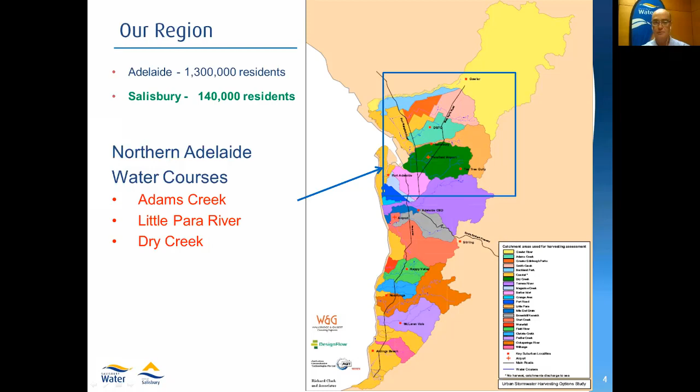So just zooming in a little bit on where we are, this is Adelaide, and the City of Salisbury is out in the northern suburbs of Adelaide. So effectively about 10% of the total population of Adelaide reside in the Salisbury area, and so we're talking about this green area on your map. And we have 3 natural watercourses that traverse Salisbury: Adams Creek, Little Para River, and Dry Creek.

Just looking a little bit of detail there, the watercourses find their way down to the marine environment and the Barker Inlet. For Adelaide people and South Australians in general, the Barker Inlet is a very precious marine environment. You can see the inlet, the mangroves. It's a very important breeding area for many of our aquatic species, but in particular the King George whiting, which is one of our tastier fish. If you're ever down in Adelaide, it's certainly well worth trying. But it's a very sensitive marine environment, and our urban stormwater all discharges into that environment.

So some 40 odd years ago, or in fact maybe closer to 50, as John Radcliffe has outlined in his excellent article on us, '50 Years of Water Sensitive Urban Design in Salisbury' - well worth a read if you get a chance. What we've effectively been able to do over the last 50 years is build a network of wetlands that intercept every bit of urban runoff before it actually reaches that Barker Inlet. We've got schemes built all the way down each of those watercourses, and what we try to do is intercept as much of that rainfall or stormwater as possible, treating it up in the wetlands. They are all constructed wetlands, not natural wetlands - they've all been built for the specific purpose of cleansing the water before it hits the Barker Inlet.

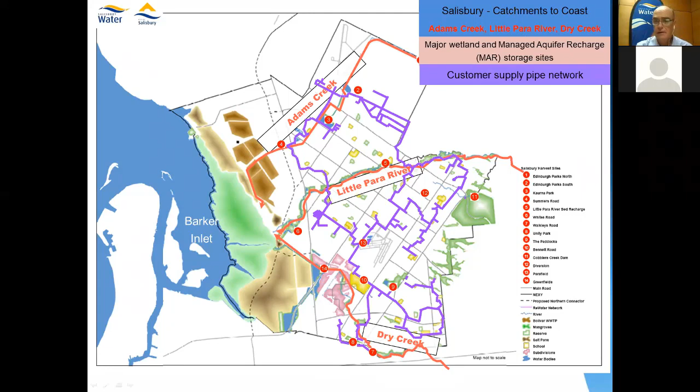Okay, so just a quick recap. Salisbury Water, our small water utility, specialises in harvesting the stormwater runoff from the urban catchment. We clean it up in constructed wetlands and biofilters. We have a number of reasonably large biofilters that treat the stormwater to meet the strict EPA quality criteria before we can inject it into our aquifers.

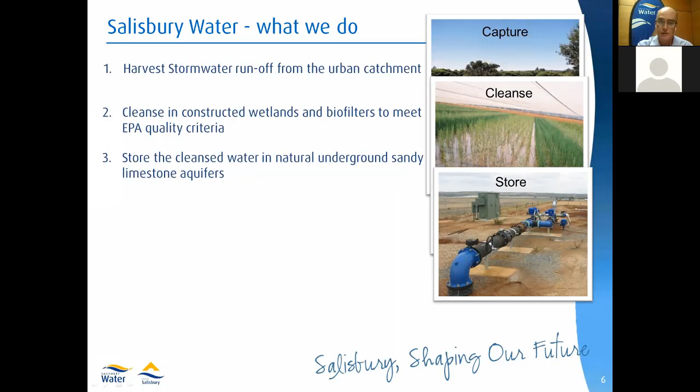We're very fortunate to have good confined aquifers, and that does give us a big advantage, which enables us to store a very large volume. We typically store 4 to 5 gigalitres, or 4 to 5,000 million litres of water per year, and then we can pull it out in the long dry summers. For Adelaide, that can sometimes be 12 to 14 weeks through summer where we don't get a single drop of rainfall, so that storage is critically important for us.

We're also starting to get right into wastewater, a little bit of a circular economy. We've already started with one customer where the water we supply to him, we take his wastewater back again, clean it up and sell it on to the next customer. We're about to take another big step, where one of our biggest industrial customers, who we supply over 1 million litres of water per day to, we will be taking their wastewater back, with the aim to put it into an energy recovery plant, an anaerobic digestion plant, to recover energy. We'll then take the digestate from that AD plant, blend it with more of our stormwater, and provide it to farmers in the area. So it's a really good example of a circular economy.

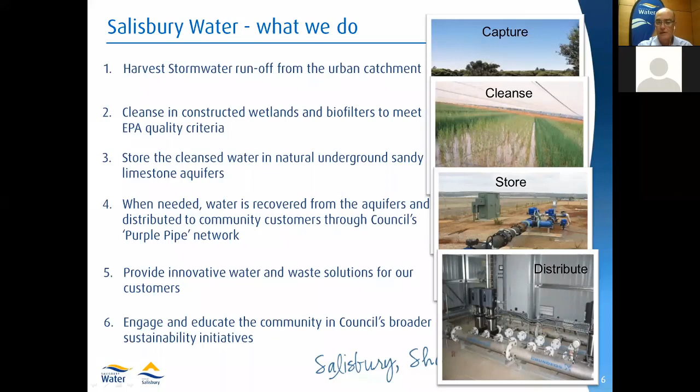The other thing we do is provide tours for the public. Quite a number of school groups and members of the general public like to come to our wetlands, and we have several thousand visitors per year that we take on guided tours through the wetlands to educate them on what our sustainability initiatives are all about.

However, most of our urban water, those 70 wetlands I mentioned earlier, we're intercepting in basins, and the first stage of our wetlands is always a sedimentation basin, then we get into the open water bodies. It's that treatment train, and typically can take 10 to 15 days to get the water quality to meet EPA standards. Once we've got to that standard, we're injecting into the natural sandy limestone aquifers. So that's a very simplified description of what we do.

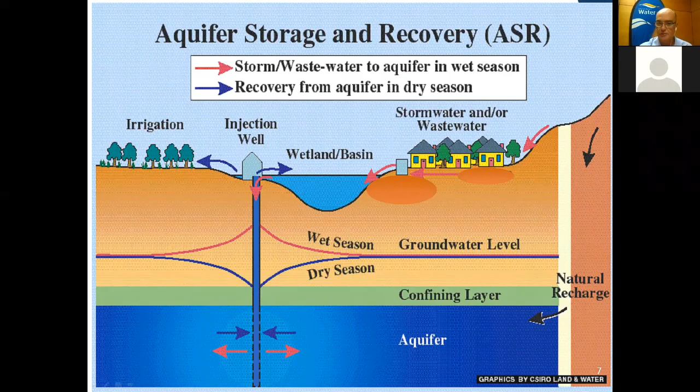So the current state, we're operating 63 wells now, and it's not just stormwater recharge. Only 31 of our wells are actually dedicated to the technique of aquifer storage and recovery. ASR is what we refer to as the system where we put the water into the same well that we extract from, so it goes in and out of the same well.

We were practicing ASTR, aquifer storage, transfer and recovery, where we would inject in a set of wells and allow the water to percolate through the aquifer and extract. We also operate simple extraction wells where we trade the credit, the actual license credit we get for injecting. And the resource manager here in South Australia, the Department of Environment, Water and Natural Resources, encourages us to inject in areas where the aquifer is stressed.

So where, say, market gardeners or industry have over-extracted, we will inject to bring those native groundwater levels back up to the natural level. In return, we get 80% of that injection credit that we can transfer to our own community extraction wells. That saves a small fortune on having purple pipe crisscrossing the city. We can actually put our well right next to a school or next to a sporting field and provide the irrigation water.

We have, however, built over the last 10 years a network of 150 kilometres of purple pipe, and 90% of that has been laid by directional drilling techniques, so horizontal directional boring. Typically our pipe sizes don't get into really large diameters, but most of our network is 280 millimetres, slightly smaller than a 12-inch diameter. That's because up to that size, it's still quite cost effective to do the directional drilling technique. Once we get beyond that size, it actually gets quite expensive, and open trenching techniques are more affordable.

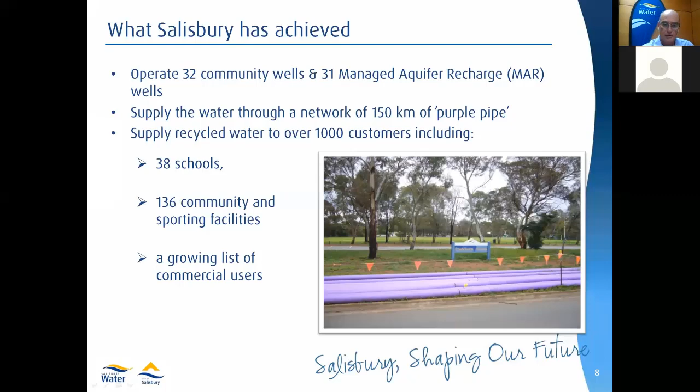And first and foremost is flood protection. We must address flood protection for all of our residents, and that's enshrined in legislation, so that is our key priority. We believe that every time you do a flood mitigation project, you can create habitat, you can create biodiversity, whether it's a corridor or within our wetland reserves, then we can create that as part of a holistic approach.

Pollution prevention is absolutely crucial to us in terms of protecting that receiving environment, because that's what people value. People in Adelaide love that marine environment - they're down in the sea every weekend, fishing, surfing. That's a very high priority for Adelaide's residents, so pollution prevention is a very key task for us.

From an economic point of view, reducing dependence on imported water is key. SA Water, our state utility, does an excellent job bringing in high quality drinking water and wastewater services, but it comes at a cost. The simple question is, can we continue to use that high quality, expensive drinking water to keep our suburbs green? That's what has driven a lot of what we've done out here - getting cheaper water so we can keep suburbs green and have playing fields the kids can play on.

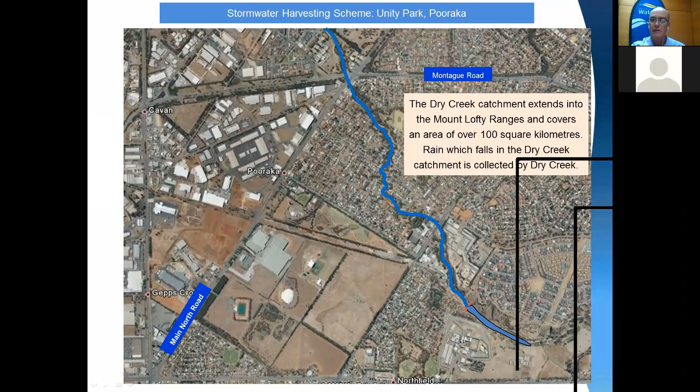So our Unity Park project at Pooraka was set out to do that, where we actually harvest from a considerable distance away from where we do the storage and distribution. It's basically trying to grab whatever free land we could and put different elements in. Our harvest site is in the suburban area on Dry Creek.

We transfer it in two ways: from a weir on Dry Creek and from a pump station down in the suburbs to our sedimentation basin. The sedimentation basin is located in a very nice little park that has a skate park, a playground, a dog park, and all sorts of great community facilities. We've been able to help landscape that and keep it green for the young people.

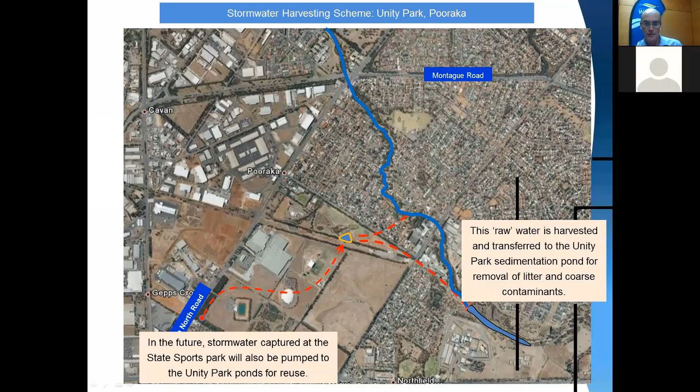From that sedimentation basin, we've already set up a node for future use from State Sports Park, which I believe has just been announced will become the new headquarters for soccer in South Australia. But from that sedimentation pond, we distribute to a set of biocells and also to twin wetlands.

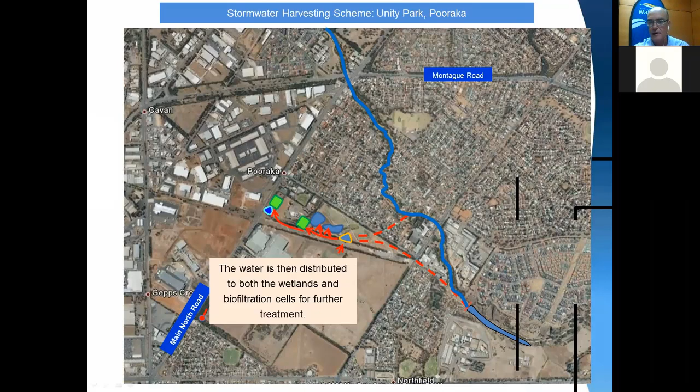When I talk about biofiltration cells, they're typically the size of a swimming pool. We've got about 11 of those, about the size of an Olympic swimming pool, and they're a much more efficient use of space. If you're really tight for space, typically the footprint of a biofilter is about a third of what you'd need for a constructed wetland to get the same water quality.

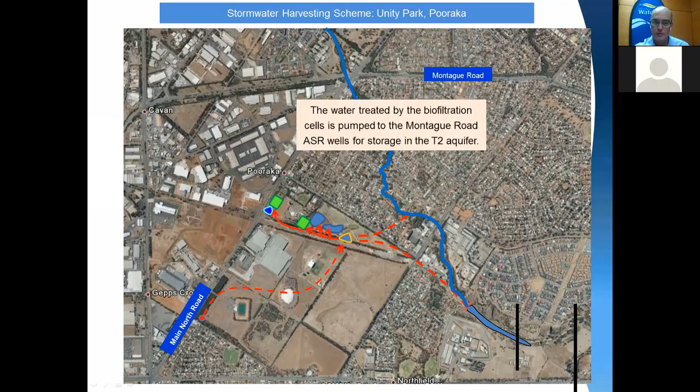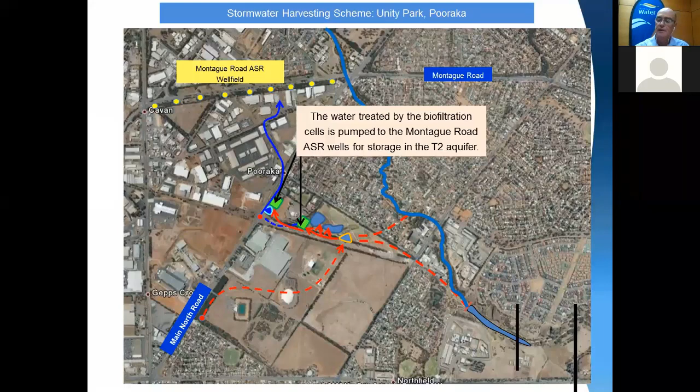Then from those cleansing sites, we transfer the water several kilometres through a light industrial area, pumping it underneath the industry and across to a road reserve. In this case, it's Montague Road next to our Mawson Lakes suburb. We put our well fields, 9 MAR wells, along the road reserve. Then from those wells, when we recover the water, we bring it back to the back of a factory.

We asked the factory if we could clean up their backyard. Like a lot of factories, they tend to have quite junkyards, if you like, or graveyards, some call it. We went in there and offered to clean it up, then purchased half the site off them and built our tanks and distribution pumping station in the back of their factory.

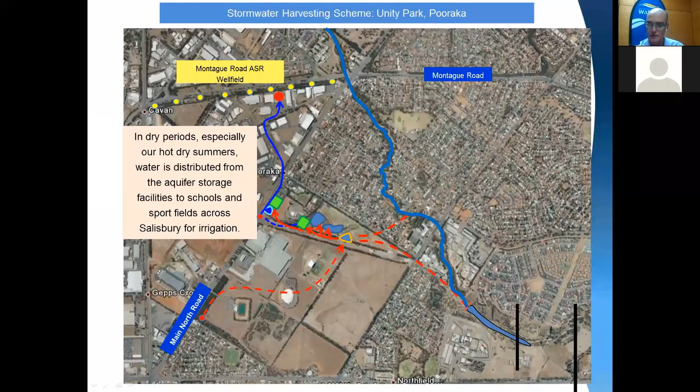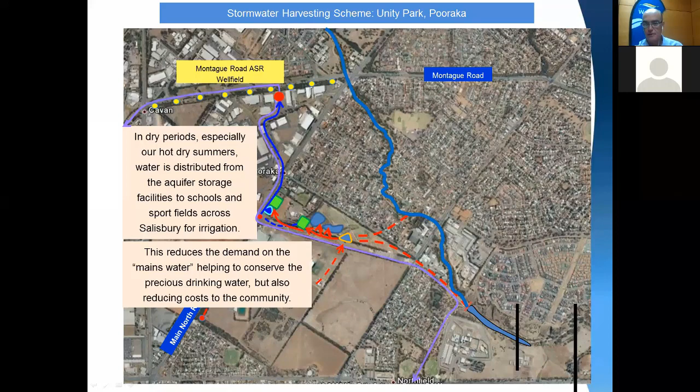Then, of course, from that pumping station, we distribute back into our citywide network that loops around the city, providing the water back to our residents in summer. So that's a very interesting, different way that you can approach stormwater harvesting.

The biocell or biofiltration cell—again, a lot of people are putting them on street curbs. I'm not a big fan of that. I'm quite happy to talk about that, but the simple fact is they're taking up usable space. The community doesn't really appreciate them. And to be honest, they're not at a scale.

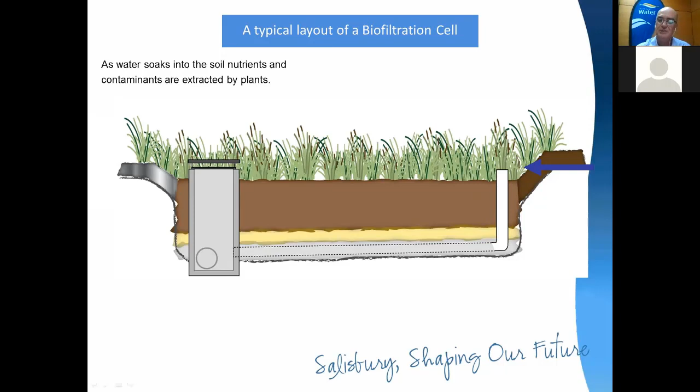One of the big lessons we've learned is that you need to get to a certain scale to make this cost effective. If you're not cost effective, I'd suggest the accountants will be looking pretty closely at what you're doing down the track. So we've always taken a very strict business approach, making sure we've had really solid business cases before we invest any money.

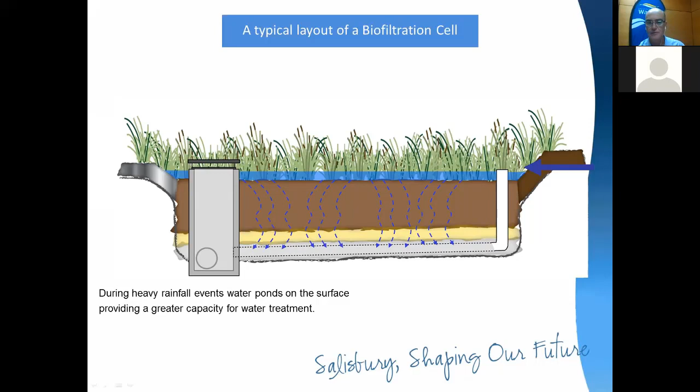My comment would be: don't be afraid of pipes and side entry pits. They're actually a lot easier to keep clean on the streets. If you really need to keep your streets clean, then side entry pits and pipes are a much better approach. Get your water away to somewhere where you can build a decent sized treatment facility and get a bit of scale into your process.

All right, obviously we also have the bigger schemes. Yes, we have the luxury of having airports. We have a defence base that we rent land from, and we have a training airport in this case where we rent land from them. We've been able to build fairly large constructed wetlands.

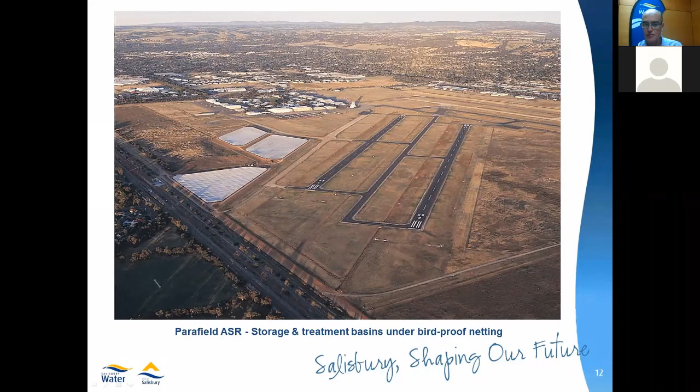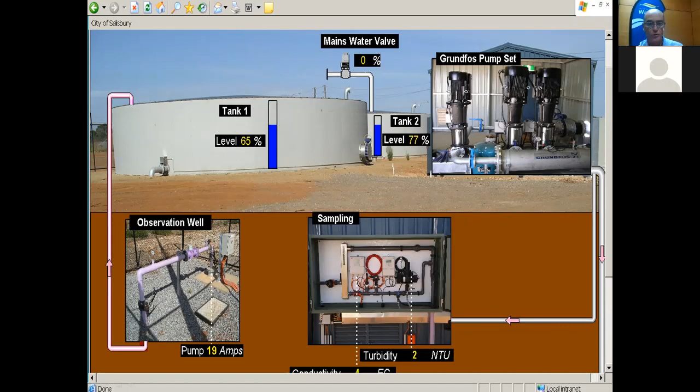Obviously, we've had the luxury of coming in late, being built in the last 10 years. We're highly automated, and we can get away with running our system with three operators, who rotate and are on call 24/7. With the beauty of computing, they can log on to the internet and access, start and stop all of our pumps, open and shut valves, and so forth. So yes, we have the luxury of being highly automated, which has helped keep our costs down.

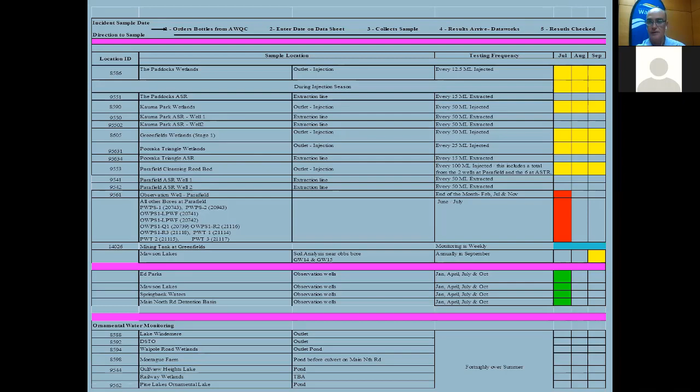Rigor, just a quick shot. Quality, extremely important. We have a very rigorous QA program. So we not only have a lot of online instrumentation monitoring pH and EC, but every 50 megalitres injected, we're sampling and sending them into the Australian Water Quality Centre, SA Water's water quality labs in the city. And that's a crucial part of what we do.

Just a couple of other quick ones. We tend to try and focus on subsurface irrigation wherever possible to keep down irrigation rates. If it's surface irrigation of turf, then it's nighttime irrigation only.

And ornamental lakes. We have a lot of ornamental lakes and water features through some of our newer suburbs. It's the trend. Developers love to put them in there. People love to pay much higher prices for houses that are next to an ornamental lake. We actually don't use our recycled water, and we don't use SA Water's recycled water. We only use native groundwater to fill up those lakes via the trading mechanism that I mentioned earlier, where we've injected elsewhere and then pulled out native groundwater.

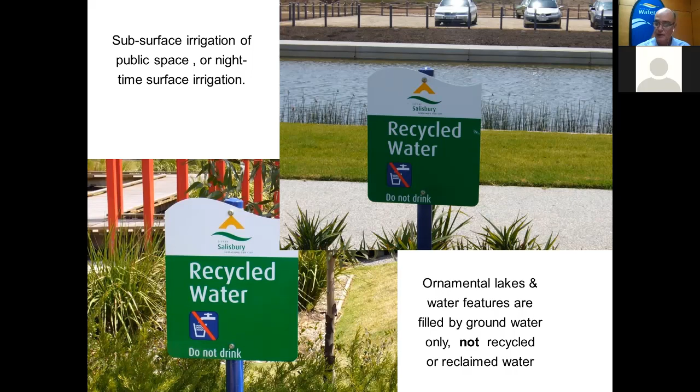And of course, then the other big issue, in-house supply. Yes, we do provide in-house, but we prefer not to. We do sell water to SA Water, and we do sell a lot of water to Water Utilities Australia, who supply into the Lightsview housing development in Adelaide. So our water is going into several thousand houses for toilet flushing.

And that, of course, introduces a whole new aspect. If I had my time again, I would recommend not to go in-house. I think our water is far too valuable to be wasted flushing toilets. In terms of the benefit it can deliver to the community, I think it should have all been going for greening of our open space and for industrial use. The issues involved in getting into houses, it's purely that risk - the risk of having somebody make an accidental cross connection is huge, and that has driven a lot of cost. It's actually added a lot of cost to our schemes that probably wasn't necessary. So that's just an interesting comment.

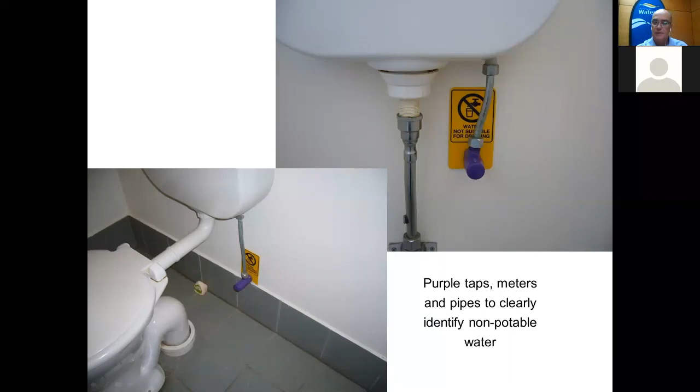Anyway, thank you very much. I might just have a look at these questions now.

No, that's great. That was an excellent presentation. Much appreciated, Bruce. We covered a lot of ground in a very short space of time, and you did it expertly. That's excellent. So look, we'll get straight into this. By all means, stick your hand up, and we'll bring you up to a full living colour on-screen discussion, which we'd love. But there's a ton of questions here in the meantime, so we'll get started.

Look, here's one from Dr. Joan van der Zoom and Tim Kirby, both from CSIRO. Thanks for a really interesting presentation, Bruce. It's amazing to see what you've been able to achieve. I'm not sure if you'd be willing to share, but if you are, I was wondering if there was anything you would change with respect to stormwater management if you had your time all over again.

No, I think we've made our mistakes along the way, Trevor, but I don't think I'd change too much. I think we found a pretty good way of doing things. But one of the interesting things I would change - I mentioned our investment in the SCADA system, the fancy electronics - that's probably our weak link, actually. And I would invest in an extra couple of operators, a couple more staff, and a bit more hands-on approach than the actual automation, managing the data and monitoring. Yes, automated.